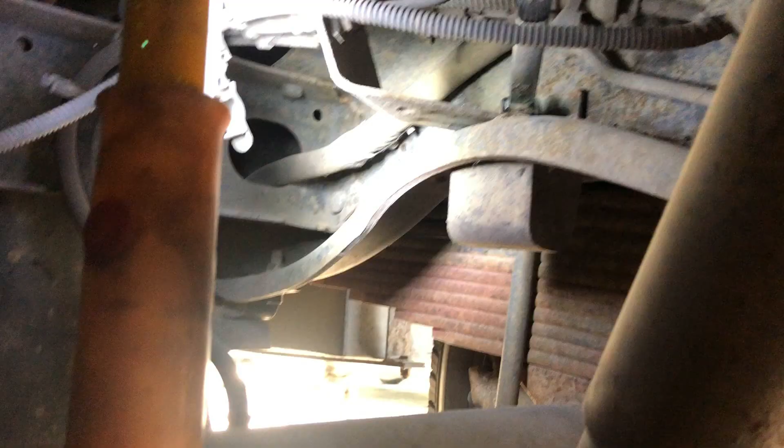So there's lots of room under here. Step one is remove the jounce bumper, and thankfully it's not seized. It says it should take 2 to 4 hours for the average person, but who knows how long it'll take in real life.

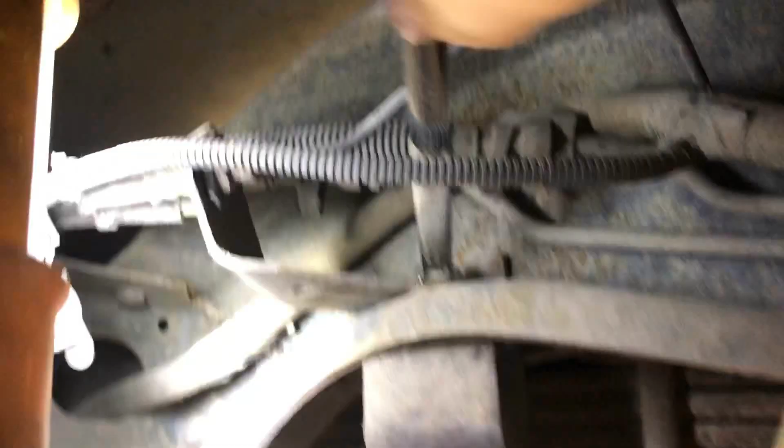Pro tip number one, just spray the WD-40 on there before you even need to. That was the easy one. The other one has got the exhaust in the way. I don't know, we'll have to get creative.

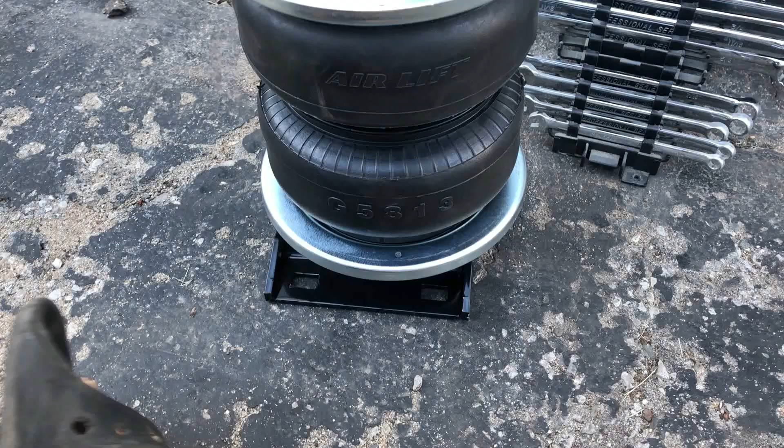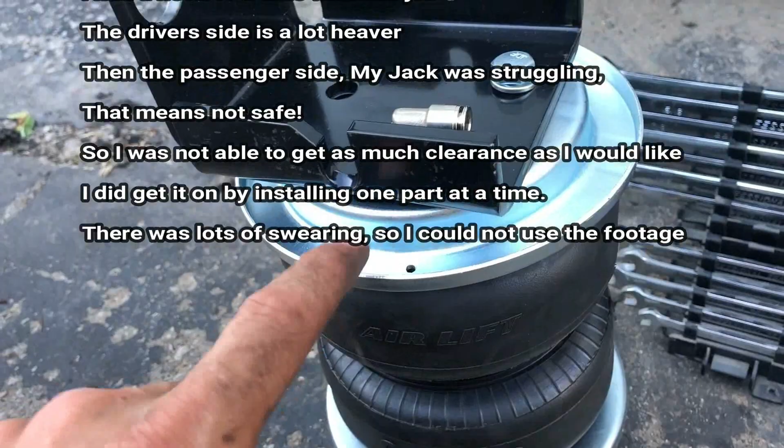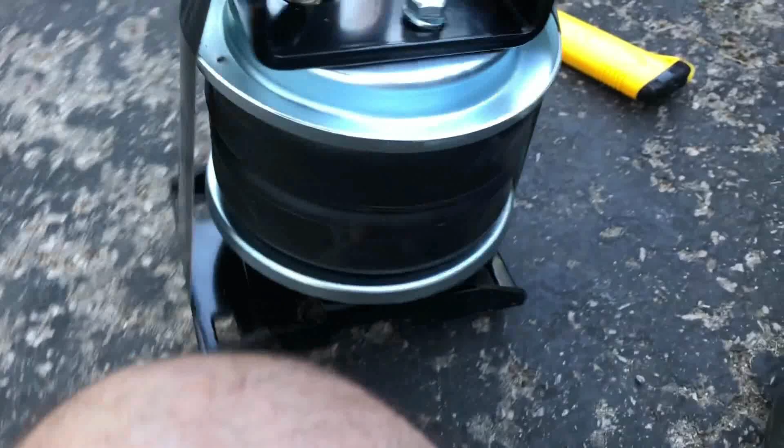Pre-assemble the unit as shown in the directions, but there is a misprint - you do have to put this roll plate piece on during this pre-assembly, and they don't mention that in the directions. I'm gonna try this duct tape compression trick, and then once it's installed, I'll cut the tape. It should spring into place.

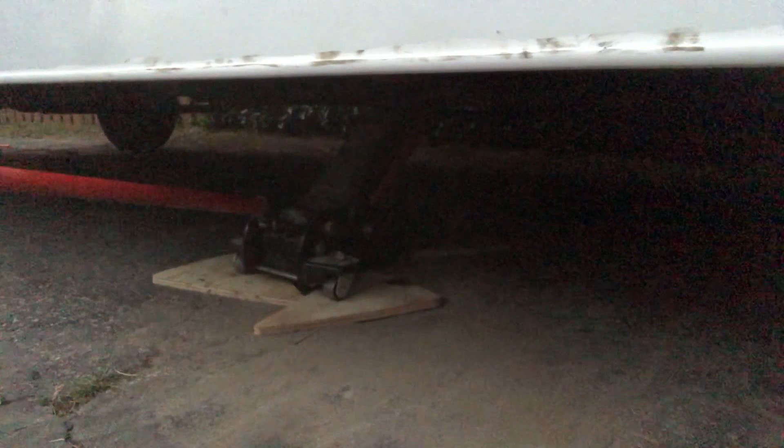While the sun is going down, I got one side on. It would be nice to get the vehicle jacked up nice and high, but I just have a 2-ton jack, so I'm not gonna push it. But if you had a bigger jack, it would be well worth it. And look, I'm filthy and sunburnt. Time to call it a night.

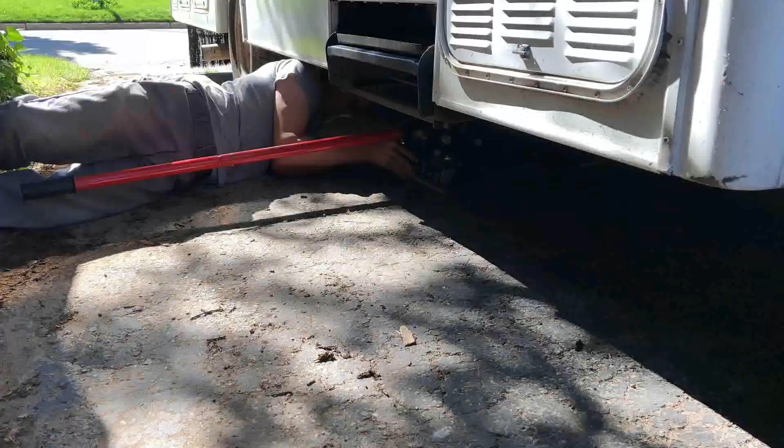Alright, it's a couple days later, and wow, what a difference in temperature. It's dropped at least 15 degrees. Nice, sunny, no humidity.

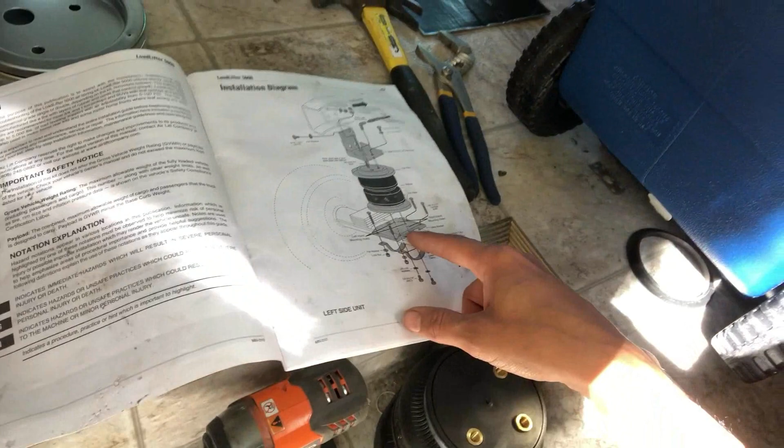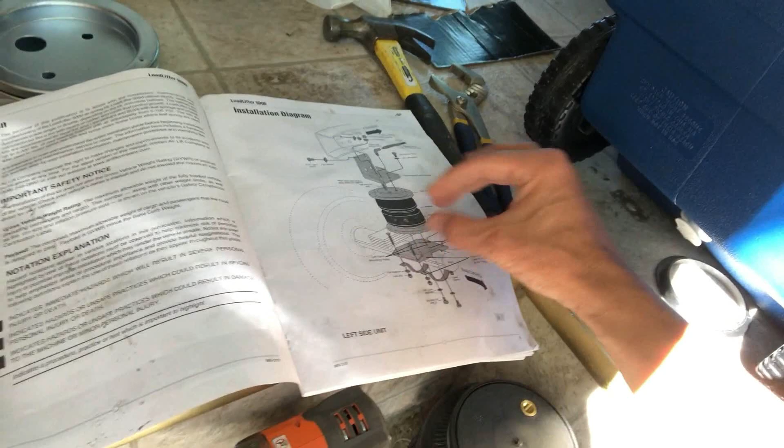The directions said to pre-assemble the whole unit, but there was no way I could jack it up high enough to get all this in there, so I have to mount the upper bracket, mount the lower bracket, and then squish the air spring into place.

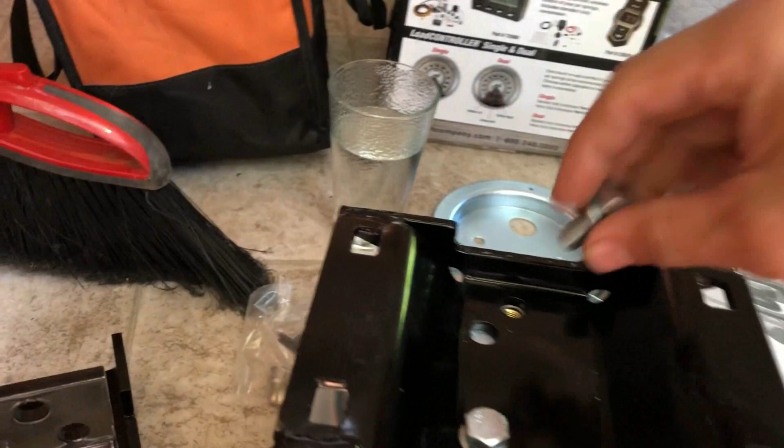So we do have to pre-assemble the bottom bracket. Make sure you have the spring, pan, and bottom bracket, put the bolts in, and then torque it to 15 foot-pounds. Time to go under the motorhome to attach the upper bracket.

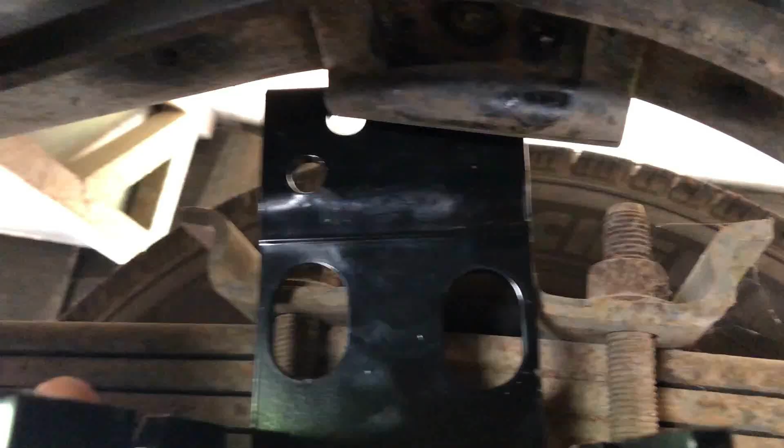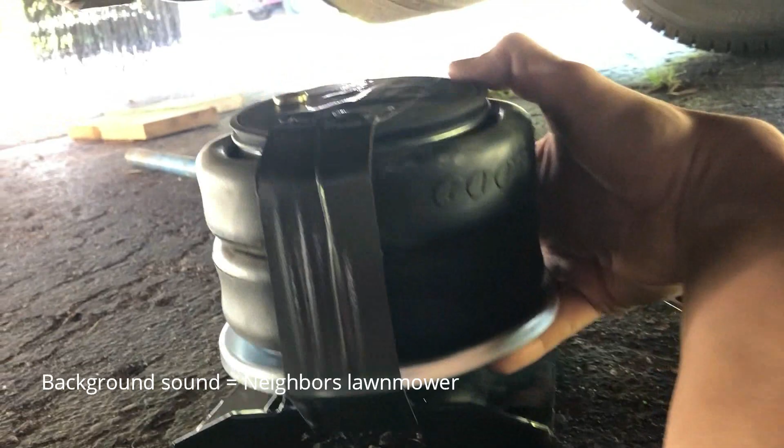So the upper bracket goes right here where the jounce bumper used to be, and up there is that hole - that's the mounting hole. So I've got the spring compressed, and we have to remember that the long tab here goes towards the rear. Try and put the microphone the other direction here.

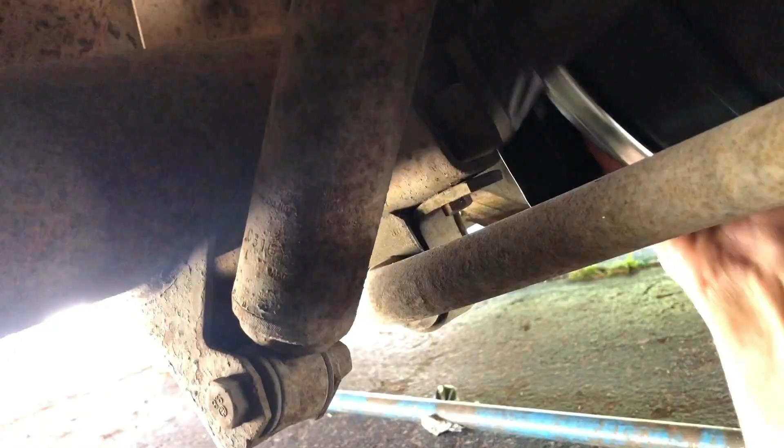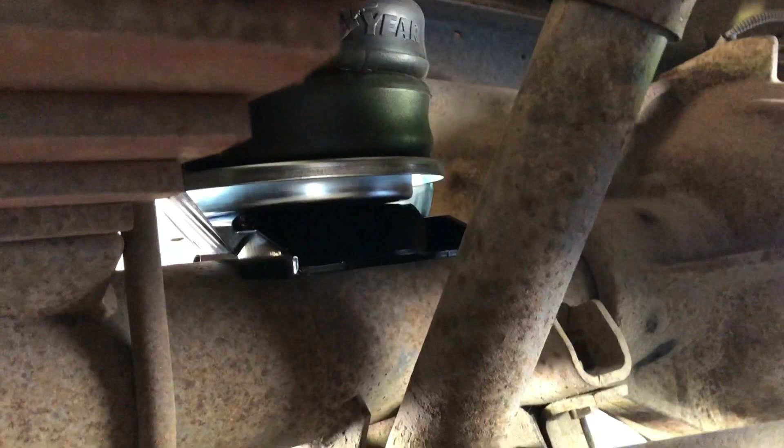So now I'm gonna go up by the rear end, under the exhaust, over the axle, and then we're gonna slide her into position. And that didn't go too bad. I must have this side jacked up a lot higher than I did the other day for the other side. So now we'll get this in position.

Next we're gonna put this top plate between the upper bracket and the spring, but make sure that it's orientated in the correct direction. This one's kind of tricky.

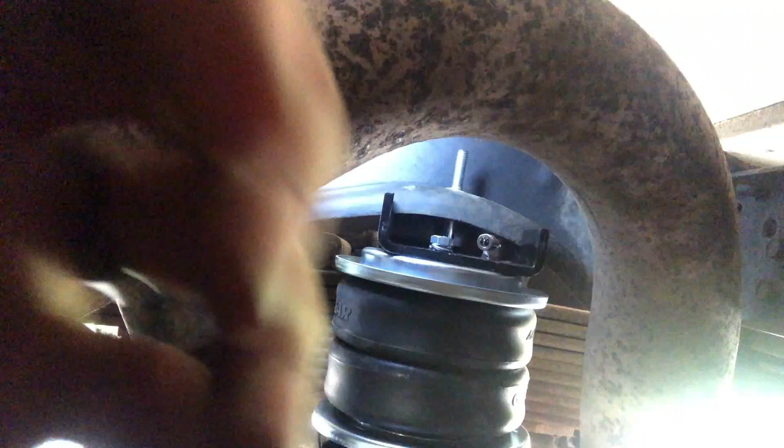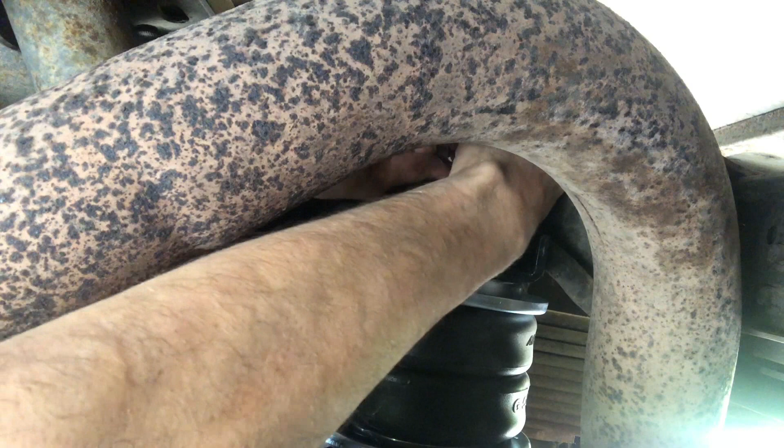I can't believe it, but I think I actually got that stud lined up. So right now I'm threading the fine thread into the spring, and then pretty soon it'll bottom out. There, it just bottomed out inside the spring, and now I'm tightening up the lock nut on the top of the stud.

Chunk of exhaust rust in my eye. Feels real good. Wow, the neighbor's finally done mowing their lawn. It was like an hour. He's got like 50 feet.

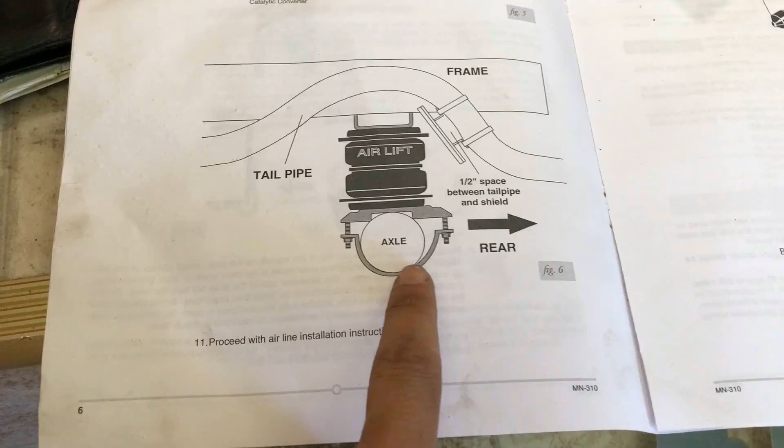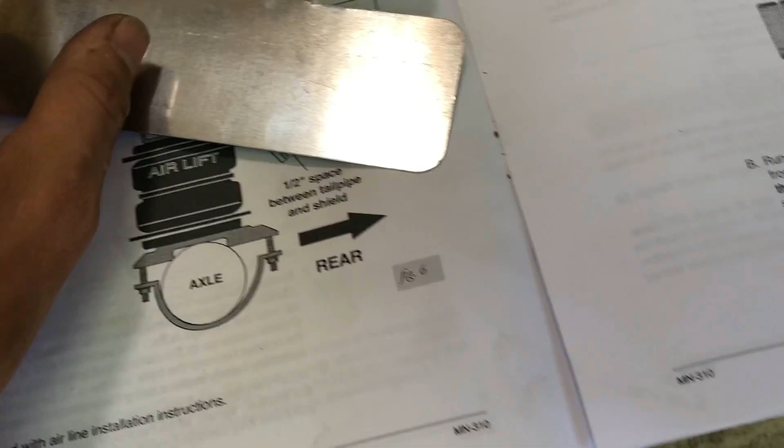I don't get it, but we're now at this part here where we have to put the heat shield on. So it comes flat and you just have to bend these tabs up. I marked off the half inch space, and then used a pair of pliers and just bent the tabs to provide it.

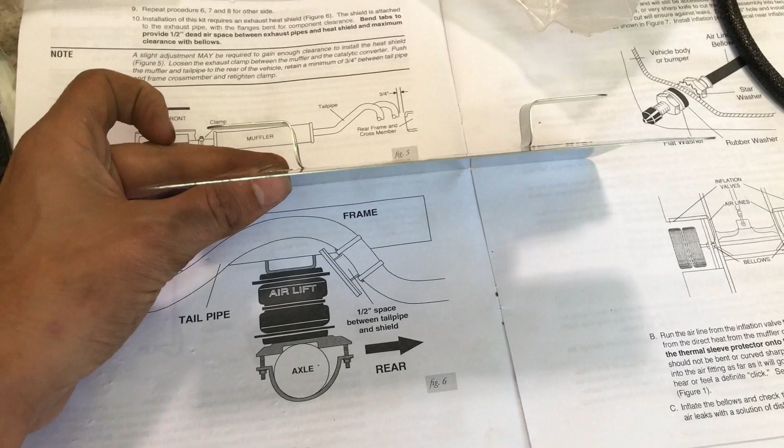I have a little tiny bit more than a half inch, but that's good. The kit provides two gear clamps that attach like so, around the exhaust pipe. So we're going to go ahead and do that right now. The directions state you may have to move the exhaust because there won't be room for that heat shield.

They shouldn't say may, it should say you do have to move the exhaust. To get that clamp off, you want to use penetrating oil, and I've got my 3-foot Johnson bar with the ratchet head. You gotta give that a good one because that's rusted on there pretty good. No matter what year it is, there's a lot of heat right there.

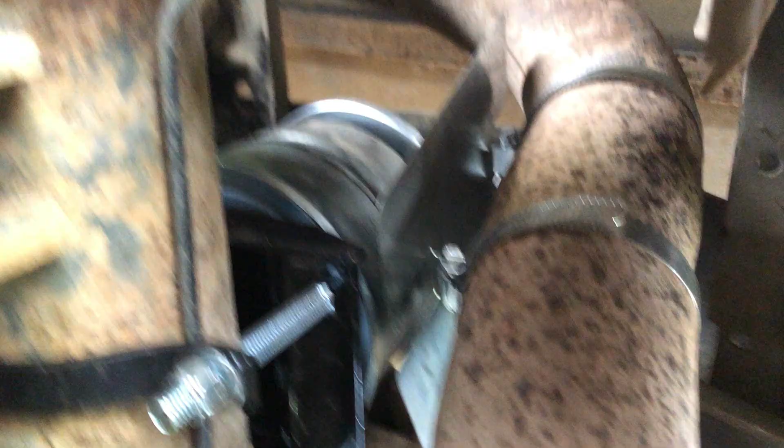So I got the exhaust moved, but it's still a ways away from the frame there, enough space for the shield, so we don't melt our brand new springs. There we go, I think that looks pretty good.

And then I'll go tighten the exhaust up at the front by the catalytic converter, where we had to pull this whole unit back about a half inch. I think we pulled it back.

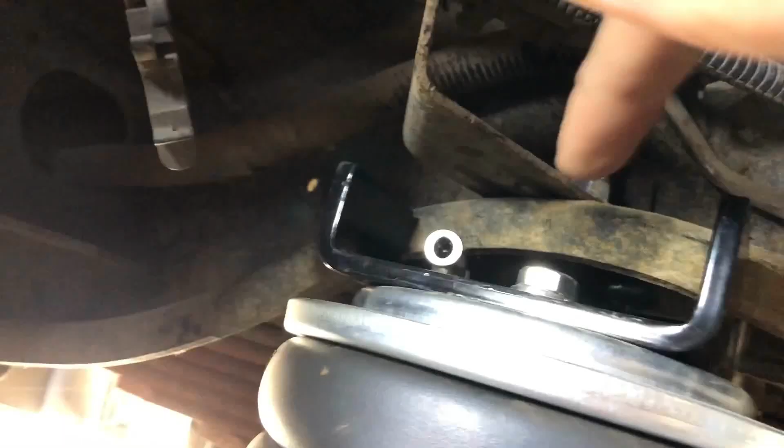So remember, this is the air quick connect. Take the line, push it in, and then give it a good push. You'll feel it slide in, and then if you give it a good tug, it won't come out.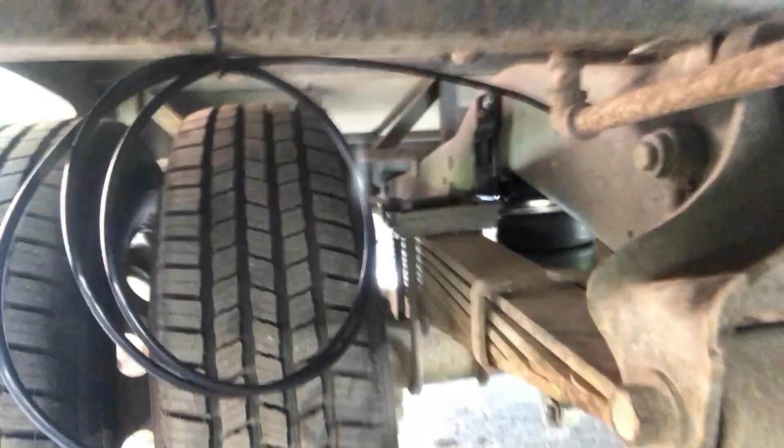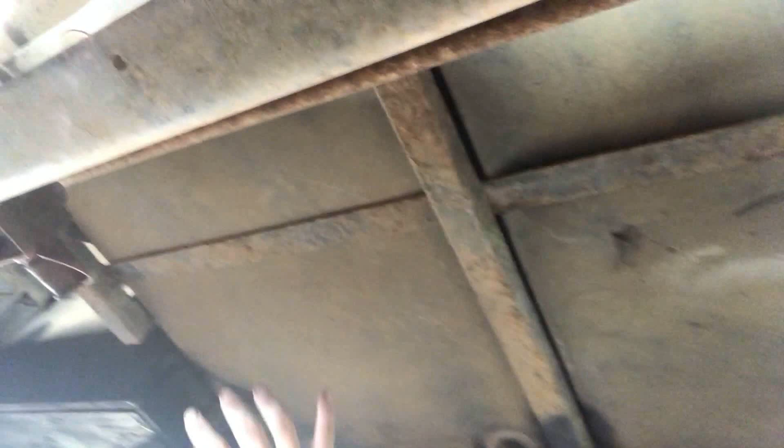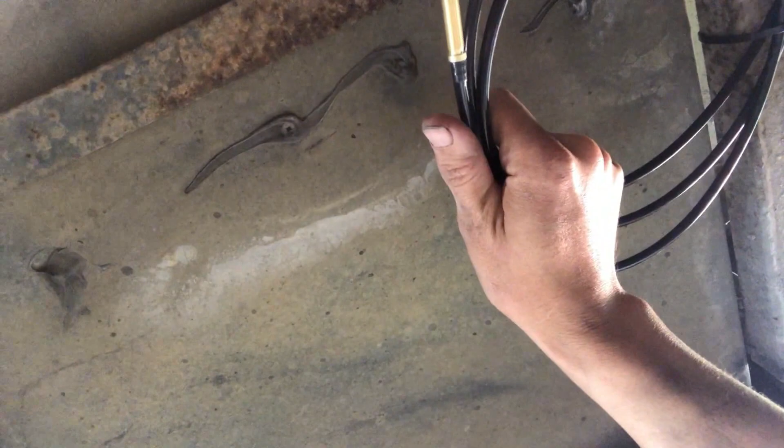We're so close, we just have to zip tie the air lines up. Got it right here. Now they say to cut it to size and even send it right out the side of the motorhome so that you can do that. I plan on, in this giant space right here, putting in a 12-volt air compressor and a tank for also a future project that you guys are gonna really love. It's gonna be fun, but I can't spoil it right now. But we need all this line, so I'm just gonna coil it up right here and save it, and just make it look nice, and that'll be good enough for now.

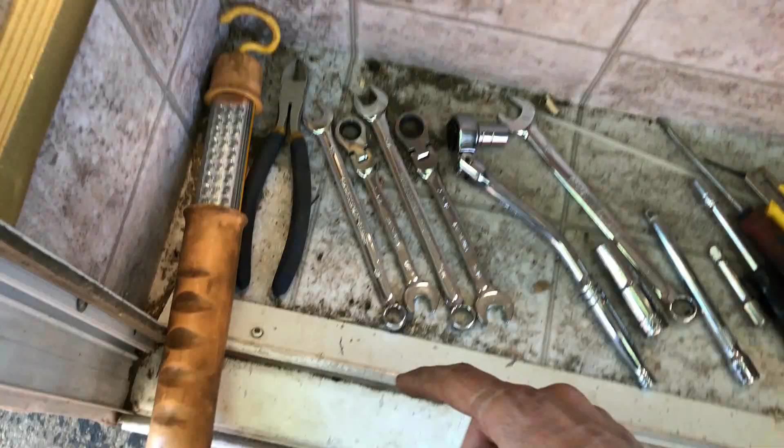For this job, you need a trouble light for underneath the motorhome. Speaking of underneath, a good creeper works great. Side cutters, I got a half inch box end wrench plus a half inch speed wrench, 9/16 plus the 9/16 speed, the corresponding both the half inch and the 9/16 socket with a ratchet. You do need the 9/16 deep socket for doing the shackles underneath that go around the drive shaft.

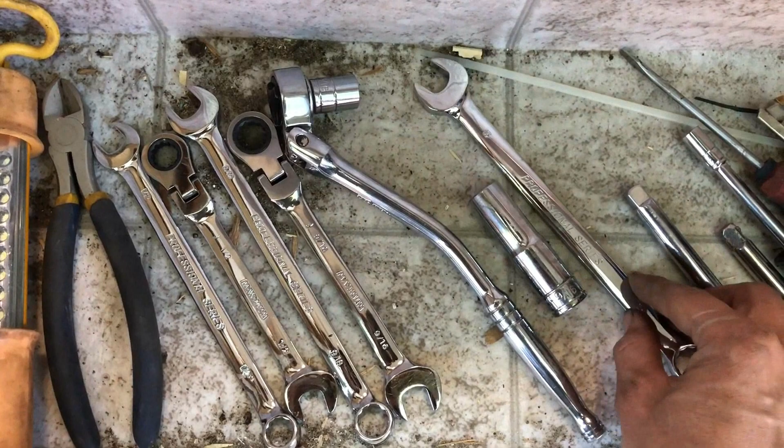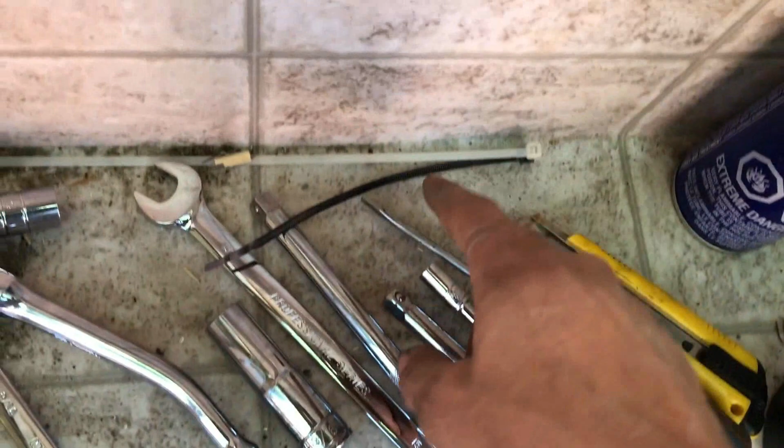You need the 15mm to remove the original jounce bracket off the vehicle. Some extensions. I have the screwdriver with a 5/16 socket, that's for the gear clamps around the exhaust. Just a flat screwdriver, knife. A few different cable ties would really help out in wiring the air lines at the end. Some penetrating oil. Duct tape for compressing the springs to get them in there. It's always a great idea.

Also, I used an impact gun to help out. You know, hammer, Johnson bar, and the 5/8 socket for doing the exhaust. Pipe, crowbar if you have any major issues. Jack, obviously, and some safety stands, some mechanics wire to hold up the exhaust.

We're testing out the new springs. As you see, it goes up, gives us a little bit more clearance for getting out of the driveway and for helping with the weight. The motorhome dangles a lot off the back.